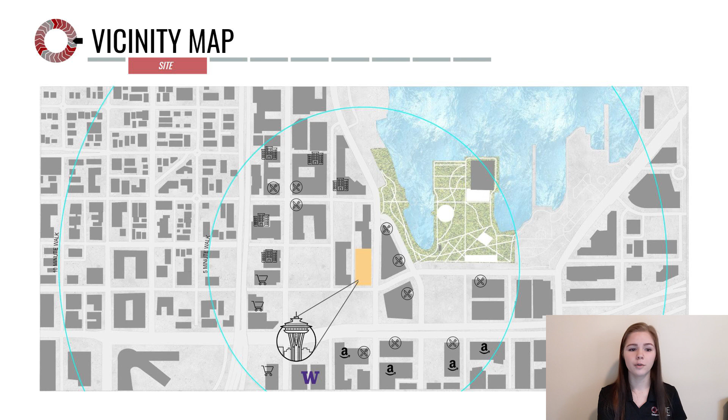Now I'm going to turn it over to Madison to talk to you all about our program design and how we use the site's elements in our solution.

Thank you, Jamie. Taking a closer look at the site plan, we took note of the two major roads running on the east and south side of the site. The southeast corner of the building receives an optimal amount of sunlight as well as can be easily viewed from the street, making this part of the site more desirable.

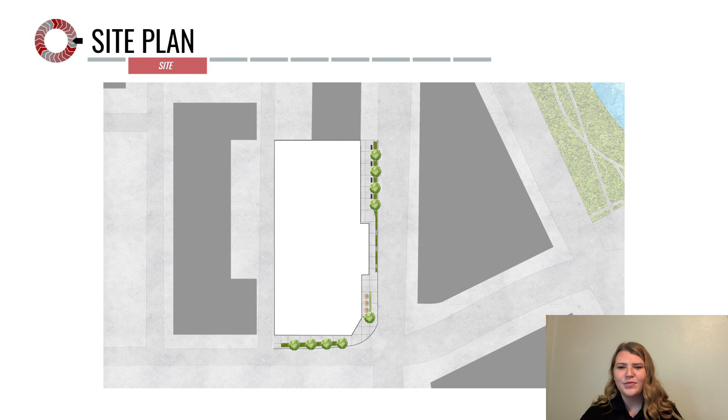We intentionally placed the restaurant in the corner of the first floor to draw the public in. The sidewalks also provided an opportunity to create connection between the private and public. By utilizing outdoor seating and vegetation elements, a relationship between the building and its surroundings could be accomplished.

To accomplish our overall goals of creating community, promoting sustainability, and gaining a market return on the owner's capital investment, we drew our focus to several different elements of the building. Our first objective was to maximize the square footage of the building. We did this by utilizing the full extent of the site throughout the building, specifically on the leasable floors, which would provide more area for the owners to lease.

Our next objective was to create street-level connection through pedestrian access. This is accomplished through several entry points throughout the first floor located on the street, which draws the community into the building.

We also focused on how the users would experience this building. Elements such as balconies, communal lounge areas, and outdoor rooftop plants allowed for a sense of community, gathering people together. The last objective we focused on was having a biophilic focus in our project.

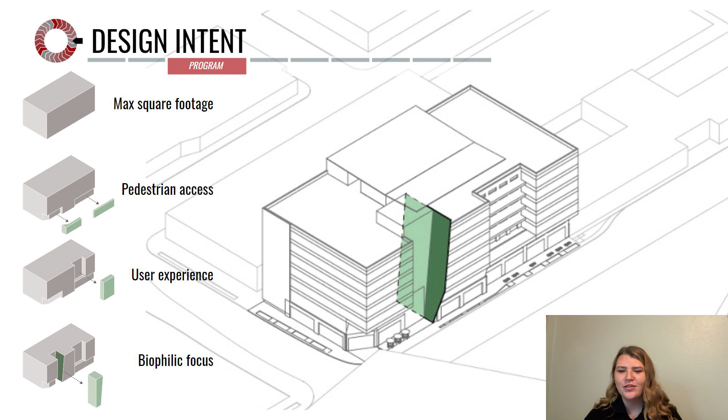Our main element is a large green wall that cuts, or rather wedges, through the entire building, providing a moment to experience nature on every single floor.

Programmatically, we focused on spacing the programs out in a way that would allow for a sense of community, while also focusing on how to relate the private and public spaces.

The green wall and atrium is placed near the street and is a focal point of this building. It draws users in and directly into the central lobby area. This key element is what brings people together to experience the rest of the building.

The restaurant is located in the southeast corner and utilizes outdoor seating next to the sidewalk in order to initiate that connection. The market is also placed next to the lobby to make it easily accessible for people using the building for work, or really just anyone out in the public.

The retail area is placed on the northeast corner, slightly separate from the other parts of the building. Leasable space is placed on the second floor on the southeast corner due to it being an optimal part of the site because of the sunlight and its street connection.

The fitness center is also on the second floor and looks out onto the street. Lastly, the community space is located central to the building and is placed on the first and second floor. This provides an opportunity to bring people together throughout the entire building.

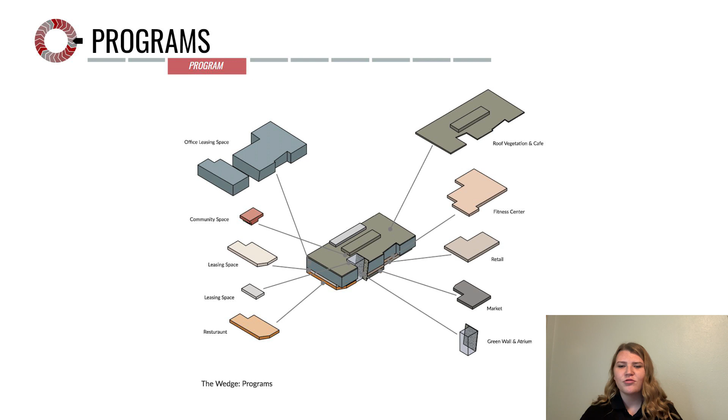Circulation is a critical part of this building and works to create a sense of community and promote sustainability. Street access from the south and east side make the building easily accessible.

Elevators and a staircase are located at the end of the lobby and travel throughout the whole building, first floor to the rooftop. In addition, this building contains a staircase located towards the street within the atrium and connects the first and second floor to all of the office levels.

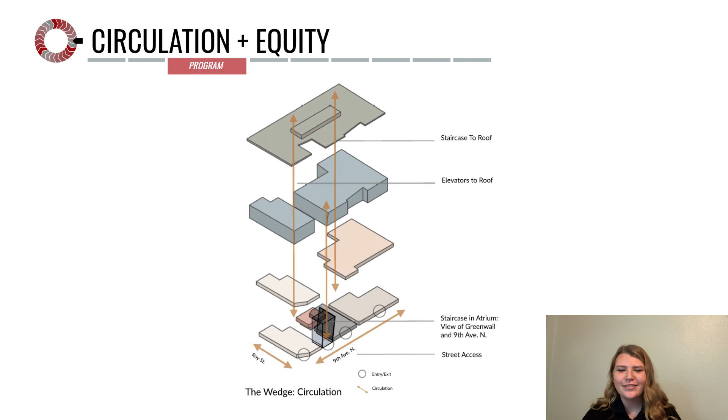The staircase looks out to the green wall and street, which provides a unique user experience. This staircase promotes sustainability through its ability to engage its users to utilize the stairs because of the experience that it creates. Next, I'm going to pass it off to Martine to discuss the green wall further.

Thank you, Madison. As we considered providing our users access to quality spaces, we made sure to highlight the impact of biophilic design in a built environment.

In our design, one of the biggest movements we made was the application of our angled green wall. Composed of modular panels, this feature spans the entirety of the building, providing access to nature to numerous spaces, starting in the lobby and extending up to the rooftop cafe.

Through this design, we were able to capitalize on and foster the benefits of biophilic design, such as reduced employee absenteeism, improved productivity, and increased employee engagement.

By adding a vertical wall, we were able to incorporate a large amount of vegetation into the project without jeopardizing too much leasable square footage.

Our green wall serves an integral role in our design, from acting as a soundproofing barrier to insulating the atrium space. Something that makes our green wall especially unique is that it extends beyond the envelope of the building, effectively creating an interior and exterior green wall.

This two-in-one feature allows us to take full advantage of each type of green wall.

The exterior portion of the green wall helps reduce urban heat and smog, while creating a habitat for beneficial insects and overall increasing biodiversity. At the same time, the interior portion of the green wall cleans the airspace by removing VOCs, or volatile organic compounds.

The direct access to the panels in the lobby allow for opportunity to grow basic gastronomic plants such as herbs.

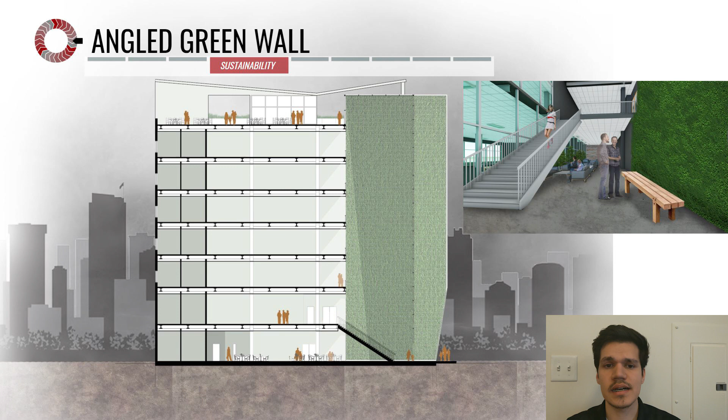On top of its sustainable benefits, our green wall also allowed us to break up the east facade of the building, as well as further accentuate the primary entrance to the lobby.

The system of panels are simple to attach to the substructure of the building. Each panel of the green wall is composed of growing medium encased in a panel box, fixed to a waterproof backing board, and anchored to a structural steel wall.

A pressurized drip line provides water to the panels to ensure an even distribution to all areas of the wall. This panelized system makes for a smoother construction process, as well as easier repair or replacement.

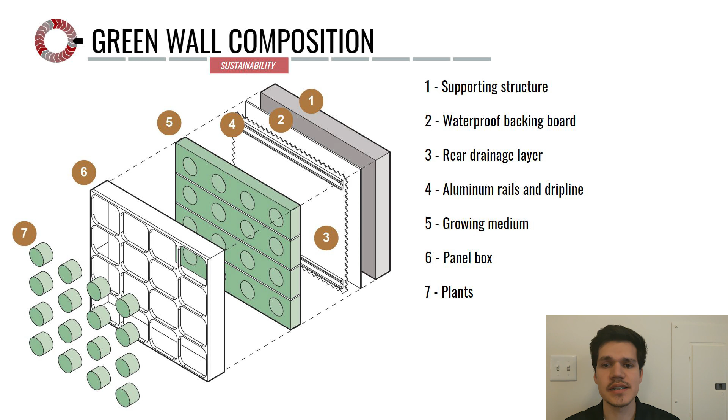A major quality of our green wall design is that we are harvesting rainwater in order to water it. By dedicating roughly 10,000 square feet of our cafe roof towards collecting rainwater, we are able to store water on the roof and filter it through our green wall. The remaining runoff is then combined with the water collected by the roof drains on the rooftop and then treated to be used as potable water in the building.

This water is treated one more time to be used as non-potable water before being diverted into the septic system. This system takes full advantage of our green wall and maximizes sustainable use of the water collected on the site.

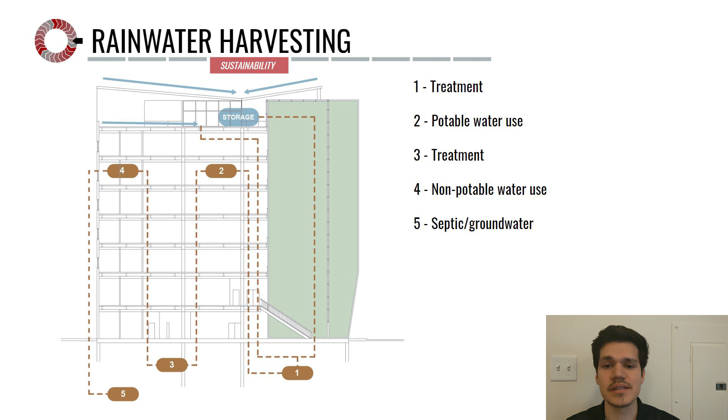Overall, our green wall helps promote health among employees, helps insulate and clean the air in our building, and plays a major role in treating rainwater. We have also incorporated our desired goals into different areas of the building, such as the rooftop and the street, and I'll now hand it over to Jamie, who will go into more depth on this.

Thank you, Martine. On top of our sustainable efforts, the green wall design was a vital decision in the project development when considering community engagement. We also translated that value into other areas of our design.

Looking specifically at the streetscape, we focused on pedestrian experience. The health and safety petal involves being pedestrian friendly, so we wanted to do that by keeping the sidewalks clean and accessible for all to get through, and then adding plenty of seating in designated areas for people to rest and step out of walking traffic safely. We also increased the exposure to greenery, specifically at eye level, by adding vegetation and greenery outside of the building to provide shade and lighten up the space.

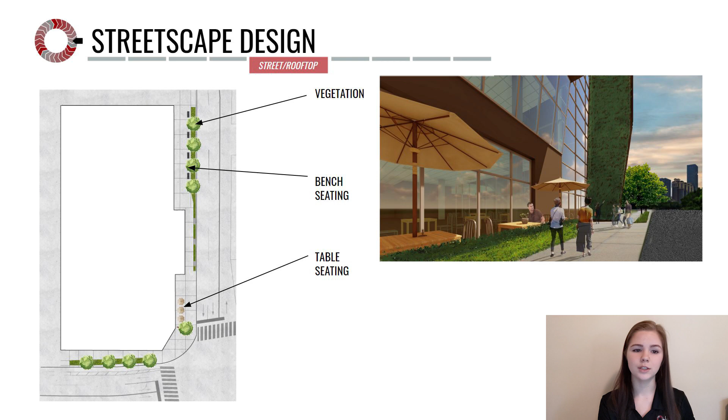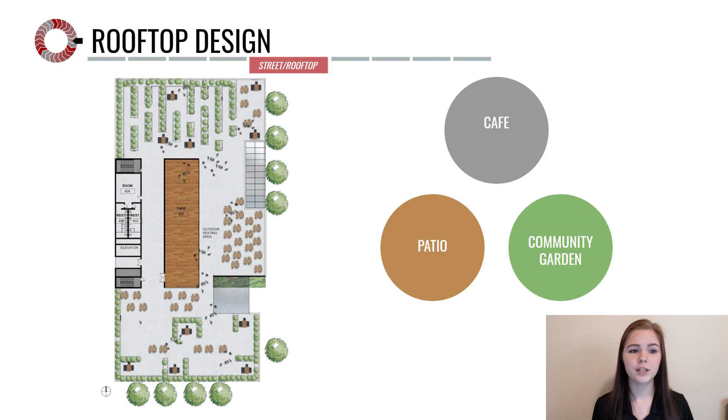We didn't want our user-focused experience to stop at the streetscape, so we implemented it in the rooftop design as well. We divided the roof into 3 different areas: the cafe, the community garden, and a patio style area. Each area serves as a space for people to get together in fresh air and enjoy some sunlight.

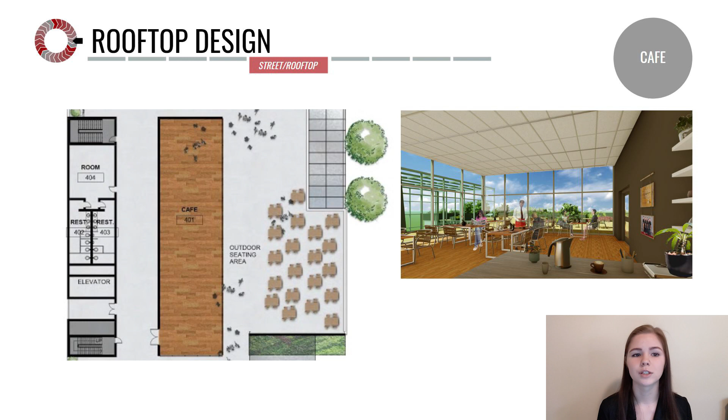For the cafe, the idea was, of course, to have seating for those getting food and drink there, but also provide seating for those who just want to unwind and relax, either from work, and enjoy the view of Lake Union. Next, for the community garden, we wanted to have an element both the restaurant and the community center kitchen could use.

A place where they could interact and learn from one another, while those who visit the garden can walk through and take in all the plants, or even learn a skill or two to take back to their own garden.

Then for the patio side, we wanted to create a community-focused space. The idea of this area was to have an open space for people to gather. People could come over here to enjoy their drinks from the cafe, or take a break from work from the offices down below, and just enjoy the view of the space and unwind.

We also added a few more private spots, separated by plants, to give those who may want more privacy the chance to enjoy the beautiful view and vegetation. But mainly we focused on incorporating these more community areas to promote interaction and mix within the space.

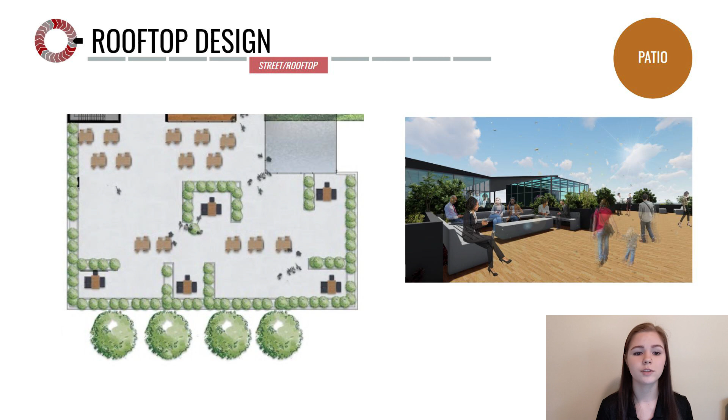Now that we've got all the key design elements for this project, I'm going to pass it off to Drew to discuss cost estimate and how we can feasibly accomplish a design like this.

Now that we've discussed the design and how the building will operate, this is what the cost is going to look like. And before I dive too deep in the weeds on the numbers, I just want to say how beneficial it was to have our design team be an in-house entity.

For me, being able to walk down the hallway or up the stairs to Jamie, Madison, or Martine's office was extremely beneficial, just for me to know, hey, am I looking at this detail the right way? Or are we on the same page to be able to deliver what the owner wants exactly?

That really came into play for the living wall we have. We got to get the waterproofing down to a T so nothing's leaking into our building or onto the other side of the wall.

With that being said, we decided to do the substructure and the superstructure as 2 mini-max contracts, and then add those on to get a total GMP. A mini-max is really a mini contract under the GMP set at a max price.

Our substructure max price was $12,500,000, calculated using $185 per square foot. Our superstructure was done at $210 per square foot, which came out to $49 million as our max, so we're not going to go over that.

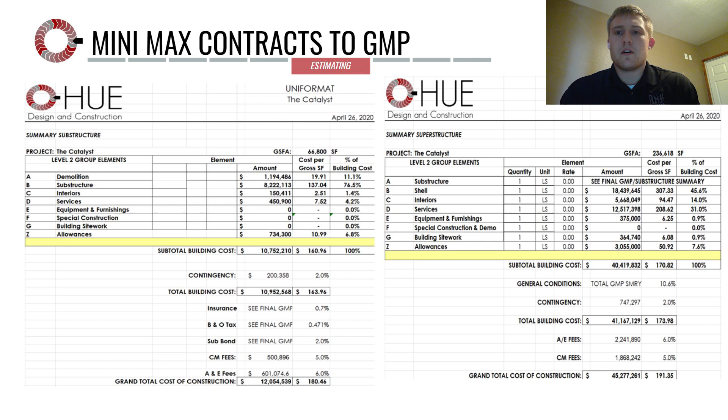With those two numbers, I included our contingency, our A&E fee, and our CM fee, which I'll get to later. Looking at the numbers, our substructure came out to $12,054,539, which also includes demolition of the existing structure. Our superstructure came out to $45,277,261.

That put us at a subtotal building cost of $57,331,800. After that, we baked in 10% for general conditions, which covers temporary offices, parking for the subs, gathering permits, layout of the building, shutting down traffic lanes, office supplies, and safety equipment for the job site.

That totaled out to $5,656,193. As I mentioned, I baked in contingency at 2% for each of the substructure and superstructure costs. For the substructure, the contingency was $200,000, and the superstructure contingency was $750,000, for a total of $950,000.

We then added our pre-construction worksheet, which covers logging our hours for meeting with the design team, meeting with the city to get what they want, gathering permits, and putting together a schedule and our estimate throughout schematic design, design development, and construction documents.

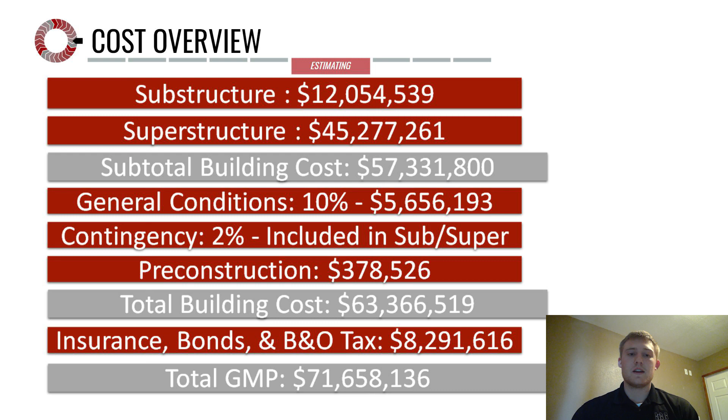That brings us to a total guaranteed maximum price of $71,658,136. As I mentioned, I was going to get to our construction management fee.

Being in the greater Seattle area, it's very competitive right now. There are tower cranes everywhere, small places to build on, and a lot of traffic, so getting our deliveries in was going to be challenging. With that being said, we chose a 5% CM fee.

We also did some research on the history of the site and noticed that right by Lake Union, some Native American tribes were present. So digging down 36 feet for our substructure, we don't know what we're going to run into. If we hit anything related, we'd have to halt construction immediately and go from there.

We also considered the water table and how shallow it was—we're going to have to do a lot of dewatering going down, so that played a role too. Most footprints in Seattle for this kind of construction are relatively small and just go up, but ours was a relatively large footprint, almost 30,000 square feet, and we're going up. That's what really played into the CM fee decision.

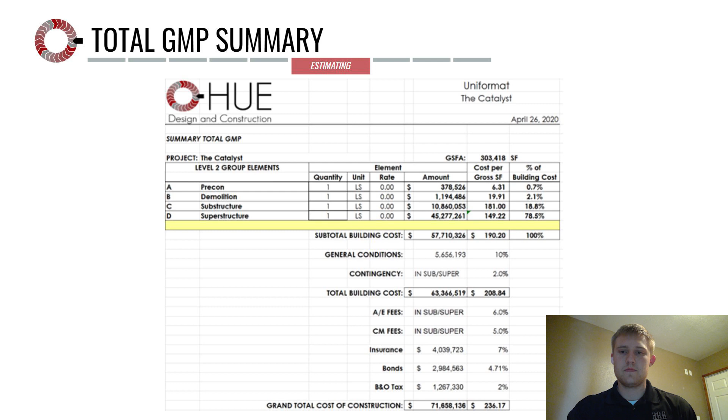So there are our numbers—71 million is our total. But it's very important to hit our schedule to maintain our price. In order to stay on time and on budget, we need to make sure we hit critical key milestones throughout the project. Our notice to proceed date for this project, at least in the construction aspect, was October 15th, 2020.

Our parking structure will be complete on April 1st, 2021. Our structural steel will be complete on July 6th, 2021, with dry-in on October 11th, 2021. Our elevators will be officially complete on December 9th, 2021, with a project complete date of January 25th, 2022.

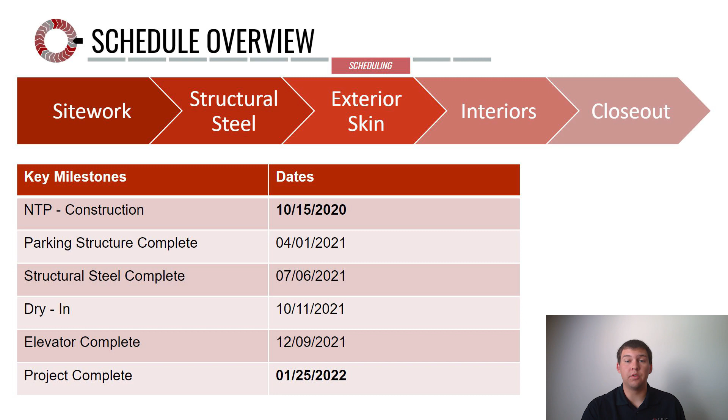Jumping right in, after we set up the site and get the demo and everything else out of the way, we'll place H piles in a clockwise fashion starting with the south, working all the way around, placing shoring and lagging, as well as excavating for lifts 1 through 4, getting down to the P3 level where we'll do our foundation walls.

We'll tie in some of the mat slabs and grade beams for the elevators and north stair cores, then jump into the south stair core and south elevators. We'll also be forming and reinforcing for our columns as well as our mat slabs and ramps, making sure all the underslab utilities are in place, including the interceptor swales, stormwater retention vault, and the sump pump.

Once we finish that, we'll continue up into P2 in the same sequence. The core pours will be ahead of the standard deck pours from level P2 to P3, and then all the way up from grade.

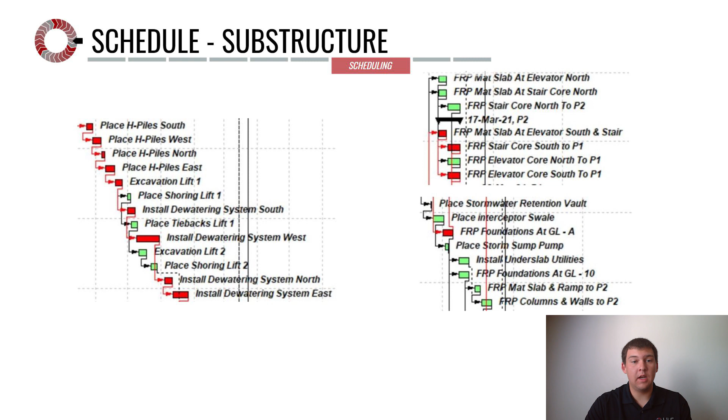So we will continue up with those cores as they progress. As we continue out with the rest of the ramp to get to grade, we will then be jumping in again with those cores being up higher. Once we hit our 4th level of core, we're then going to be starting with our structural steel.

Our structural steel will then be erected, and the metal deck will be placed, as well as our living wall. We'll be building that up as we go. As that's going up, once we're about 5 floors up with our structural steel, we'll then be able to start our exterior skin, our exterior envelope.

Again, starting with that south elevation, working in a clockwise fashion, south all the way to the east, working on that metal panel, curtain wall, and storefront where needed.

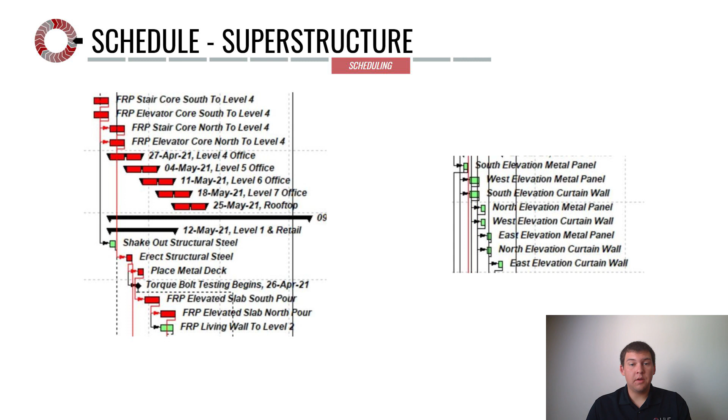Once we finish out with our exterior skin, we're going to begin our interior improvements. Our interior improvements will start once we're about 5 floors up with the exterior skin, doing our in-wall rough-in, our wall layouts, MEPF layouts, as well as in-wall inspections, getting our ACT grids in place, and all of our interior finishes. At this point, we will be removing the tower crane.

The tower crane and man lift will be removed because we will be utilizing the north elevator. This was actually incorporated to be finished earlier, so we can utilize that and remove the tower crane and man lift accordingly. So once we jump into those finishes, continuing up from the 1st floor all the way up to the roof amenity space.

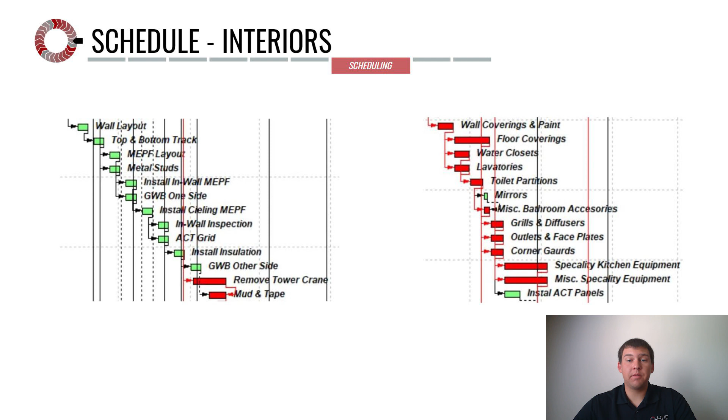Where we will jump into our exterior improvements, which is our curb and gutter, landscaping, bollards, as well as handrails and miscellaneous items throughout the site on street level, as well as up on the roof. This will also include the landscaping for a green wall, as well as the testing and balancing and commissioning of

all the other MEPF equipment that we will have at this particular complex.

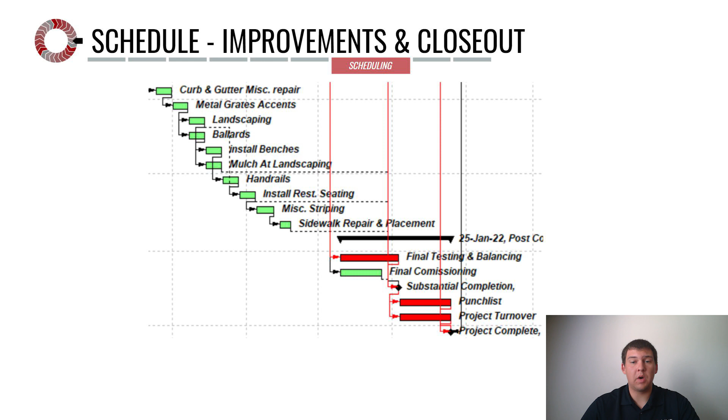We have our substantial completion date there. With our punch list, we left our punch list a 3-week time period as well as project turnover at the same time to really be able to focus on all the areas that needed to be adjusted to make sure we get the building as fine-tuned and the owner as prepared as possible for turnover of their brand new building.

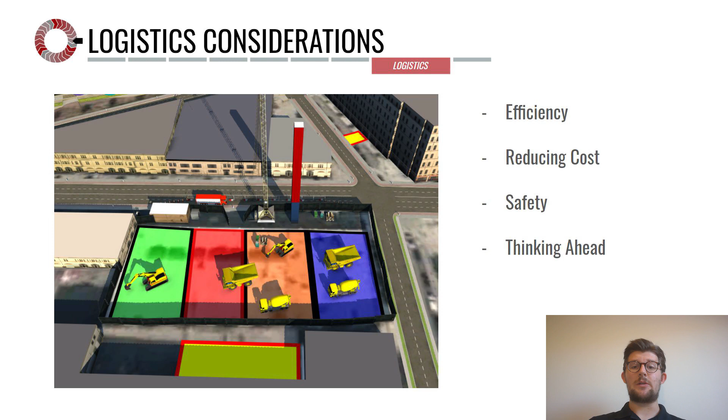Efficiency is one aspect of site logistics that is important, but equally as important is figuring out ways to reduce cost, promote safety, and thinking ahead. So what does that look like in terms of getting to and from the job site with those themes in mind? In terms of efficiency, that looks like getting freight to the job site as seamlessly as possible.

We designed a route that is a quick drop off of the I-5 corridor. In terms of cost, getting freight to and from the site without hiccups is just as important. Our route utilizes minimal turns on small arterial roads.

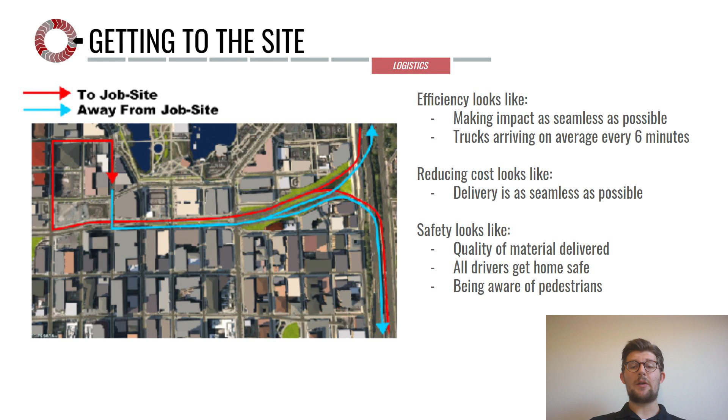Getting to the job site safely means quality assurance of materials. All roads were thought with the intent of providing little start, stop, or turns for tipping as possible. Making sure our truckers are safe and being aware of pedestrians was also one of our top priorities.

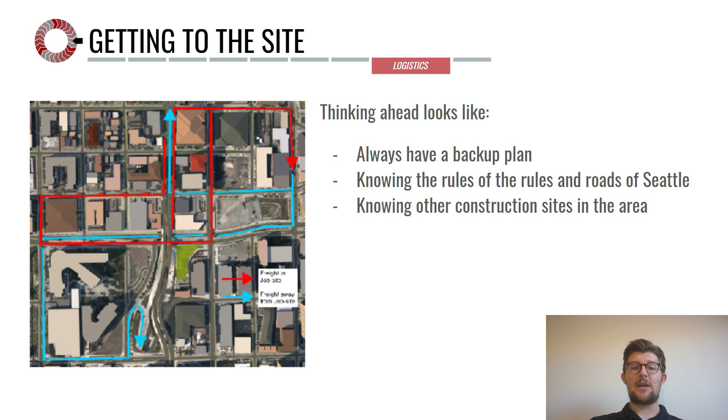Thinking ahead for getting to and from the job site looks like having a backup route when the traffic is slow or the lanes are shut down on the highway. We did this by utilizing State Route 99. We also considered height and weight restrictions from roads, tolls from the 99, and construction sites like the one across from Roy Street when picking our freighting route.

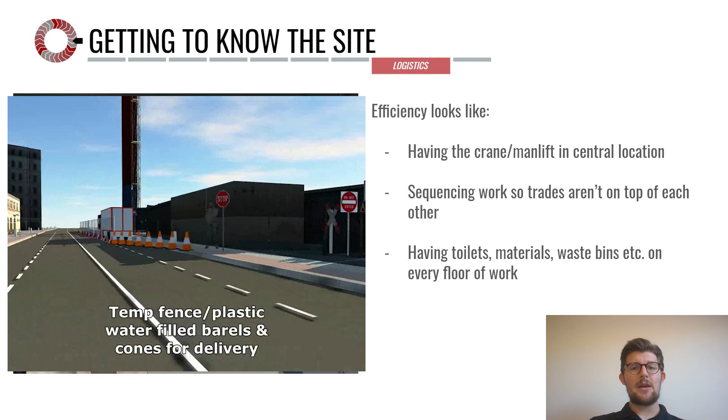But those are just about getting to the job site. Getting to know the actual job site and how it can be more efficient, less costly, safe, and prepare for future challenges are just as important.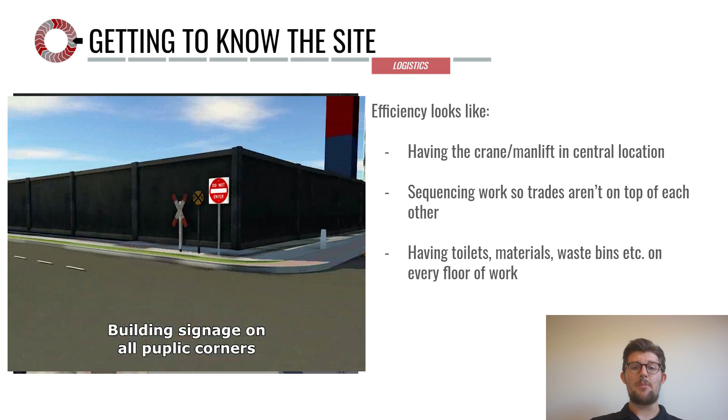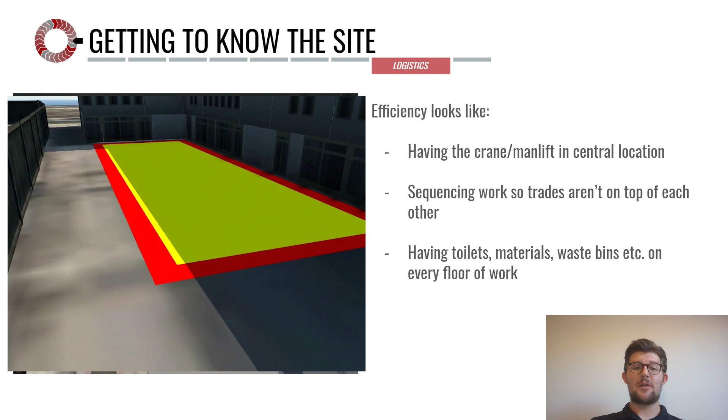In terms of efficiency, that looks like having a crane and a man lift strategically placed at the center of the job site along the 9th Ave street for short laydown times. Sequencing work so no trades are waiting for others to get done, or having toilets, materials, waste bins, and tools, or like what we like to call TWMT, on every floor to save trips back to the ground level.

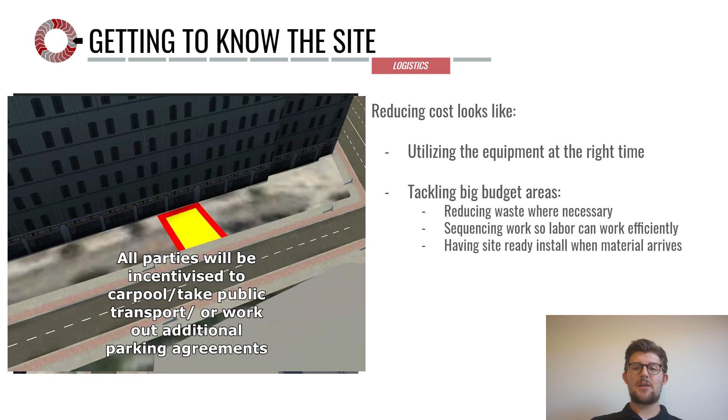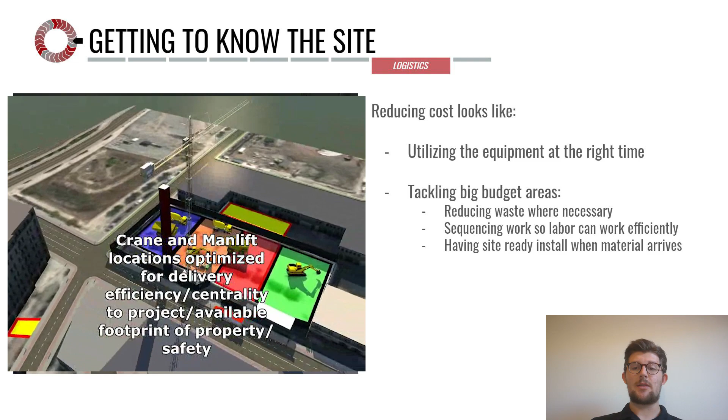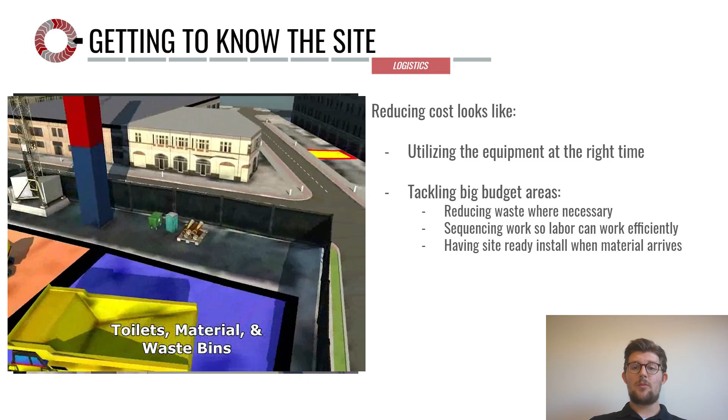All of these considerations reduce time, which reduces cost. Reducing cost in site logistics also means knowing what materials cost the most and prioritizing those items to be installed right away and without waste. Examples of this might be the green wall, like we've discussed, or structural steel, which are big budget items. Safety on the job site looks like sequencing so trades never are stacked.

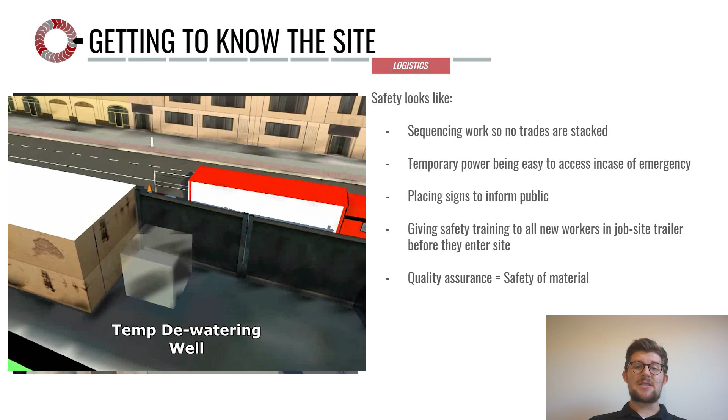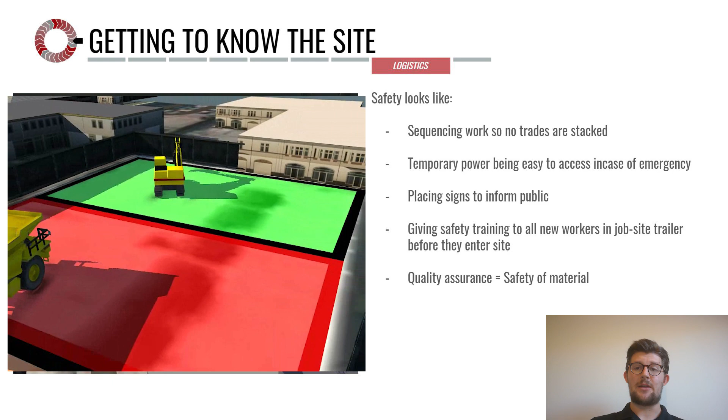There are also other considerations, like placing temporary power in a spot that's easy to access in case of emergencies, or placing signs on each corner of the job site to inform the public. All of these logistics have to be put in place with the public and pedestrians in mind, and how to tackle new challenges as they come.

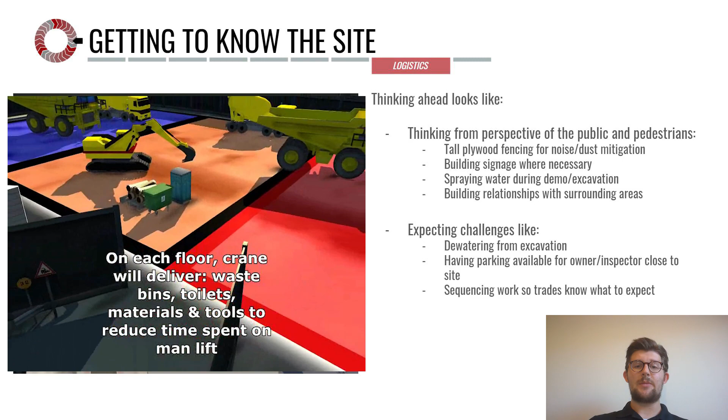With the public of Seattle in mind, we want to bring 10-foot plywood fences for noise and dust mitigation. We also want to have building signage on every corner of the site and entrances to keep the public informed and safe. We want to have personnel spraying water to keep dust down during activities like demolition and excavation.

We want to build relationships with the community, like feeding the transitional housing community at 800 Aloha Street. Additionally, we want to prepare for new challenges that might arise, like having people with experience in dewatering for excavation. We want to provide parking for the owner and inspector right next to the job site in case they need to see something right away, providing a seamless experience. And we will hold pull planning meetings weekly to make sure sequencing activities are running smoothly.

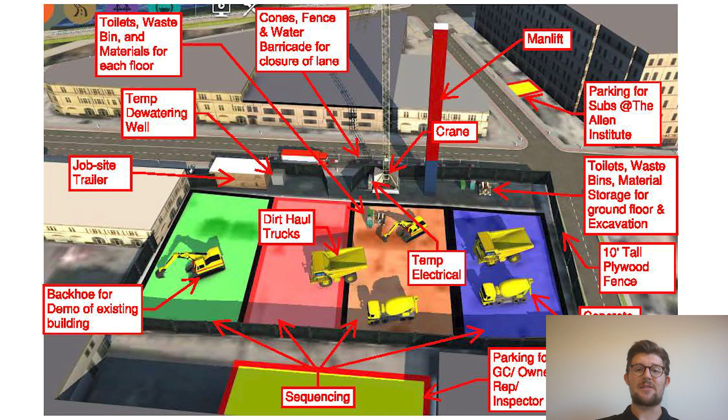All of these points are important to consider to make construction flow smoothly. And to put the cherry on top, Hallie is going to tie our site logistics back into the project as a whole, going from schematic design to punch list. Hallie?

Thank you, Shane, and a big thank you to the rest of our HUE team. The site logistics plan is immensely crucial to the efficient completion of any construction project. For the Catalyst, working in downtown Seattle, we must consider the access limitations we will encounter due to height and weight restrictions on the highway.

To combat these limitations, we have developed multiple plans for entry and exit of the job site, depending on which of the major access ways are utilized during the construction process. Our site is laid out in a logical manner that optimizes flow throughout the site and enables our personnel to operate in the most efficient way to accomplish their job.

The Catalyst project has a total guaranteed maximum price of $71.6 million. Our estimating and design departments have worked diligently to ensure these numbers will get you, as the owner, the most efficient, effective, and longest-lasting building that HUE can construct.

With a total project duration of 467 calendar days, HUE and our trade partners have worked out the most efficient timeline for the construction of your building. This construction schedule has been refined to streamline how all parties will put their respective parts of work in place. Because we've consulted with our various trade partners on this schedule, we have further optimized this process, as all parties are fully invested in this construction plan.

All projects that HUE Design and Construction take on are tackled with our 5 guiding principles in mind. First, generating market return: this state-of-the-art project is designed with any type of future tenant in mind. Restaurant, retail, or office, the Catalyst is fully prepared to be suited to their needs.